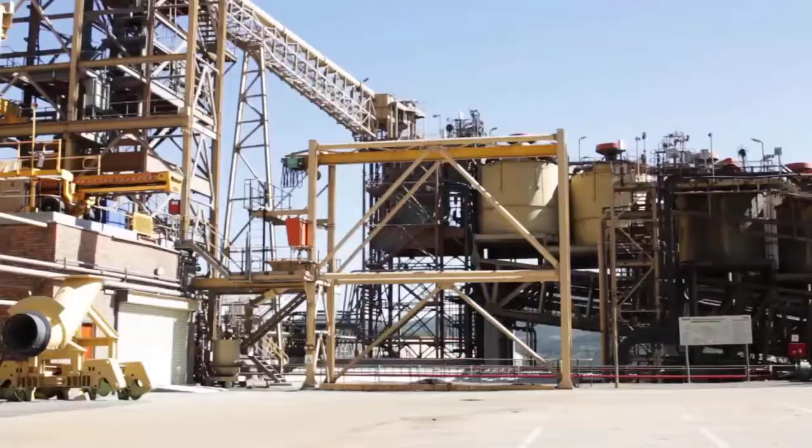Most continuous production processes operate for less than 30% of the time in ideal state, which represents substantial losses in terms of production output, costs, asset performance, quality, and impact on the environment. The TimeinState program implements a solution that increases the percentage time in ideal state and thereby delivers higher operational efficiency and effectiveness. Results include more than 18% increase in production output and increases in energy efficiency of over 7%.

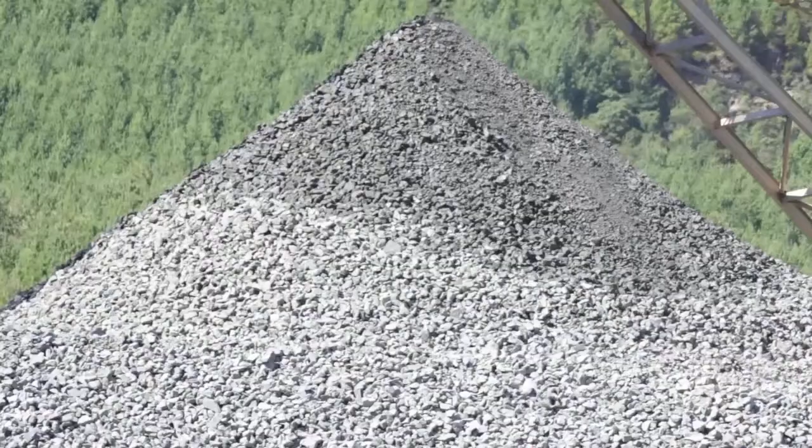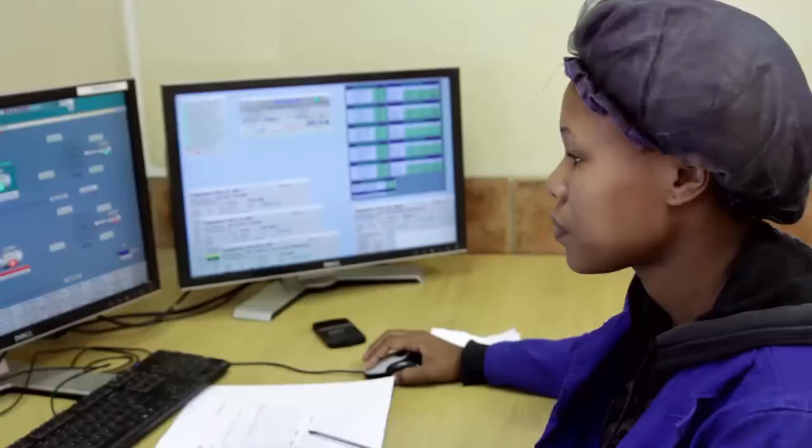These improvements translate into multi-million-dollar gains. These gains are delivered without changing the production process or equipment configuration. In any continuous process, maximum productivity is reached when equipment functions in ideal state or the optimum operating envelope as much as possible. The problem is that processing plants observe significant variance in performance, irrespective of sophisticated process control systems.

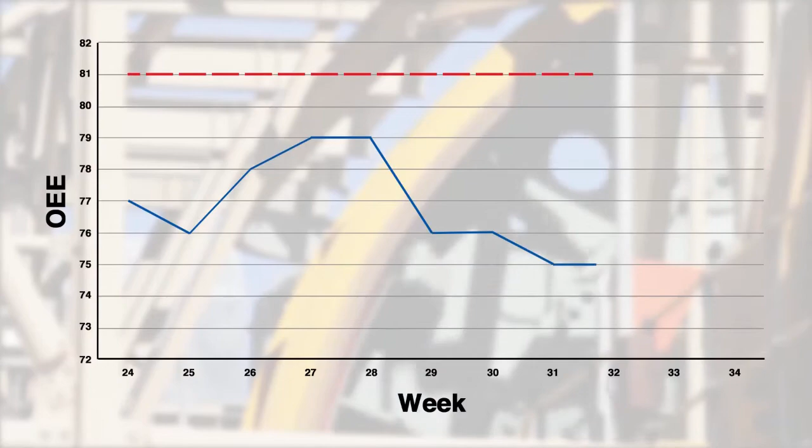In fact, most continuous processes run in ideal state for less than 30% of the time. Needless to say, this has a massive impact on profitability. Over the past few years, various performance measurements like OEE have been applied in industry. Unfortunately, these solutions have their limitations and, although perfect for discrete processes, they can mask inefficiency in continuous processing plants.

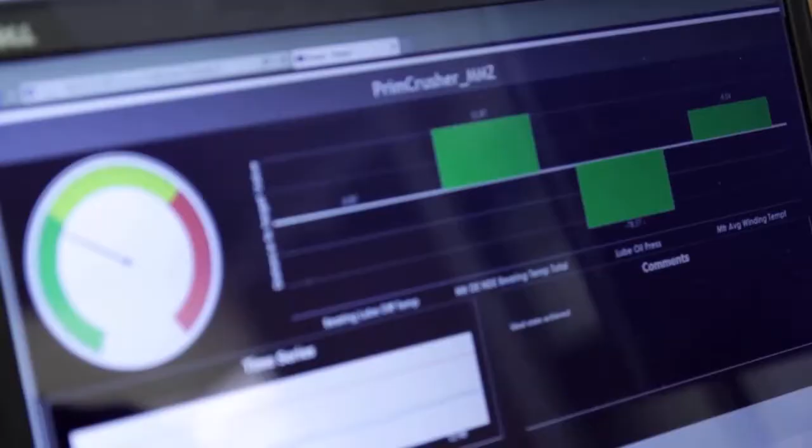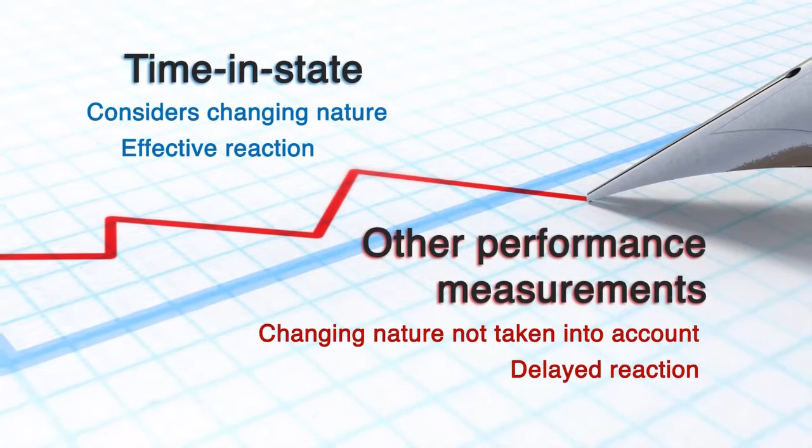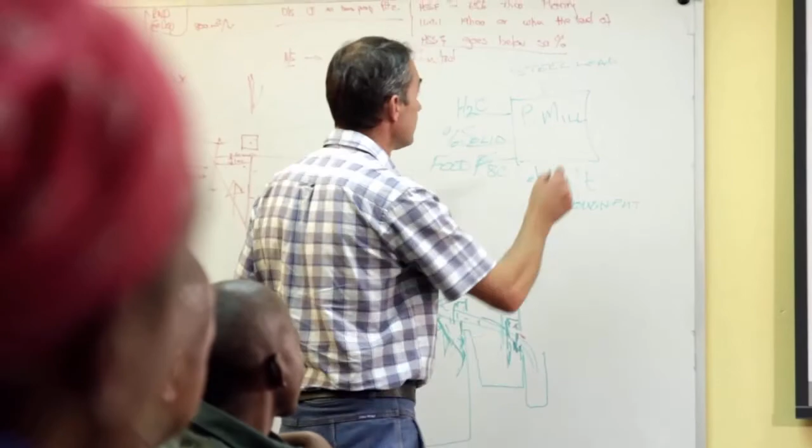It actually takes into account the changing nature of the continuous processes and the effective reaction to adverse factors influencing them, making it a far more useful metric for proactive management of the production process. The TimeinState system is implemented in various phases, starting with a current state definition and the compilation of a performance driver matrix, a critical element to facilitate emotional and intellectual engagement.

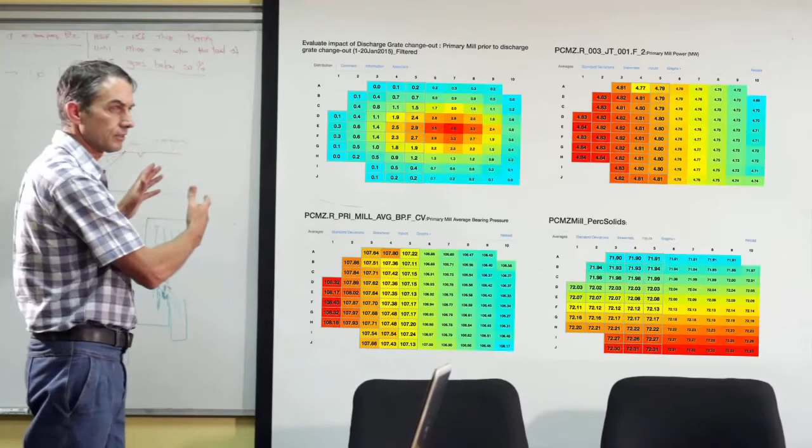TimeinState analytics is then used to extract and visually represent variable interrelationships in performance maps. These maps aim to define specific operating conditions that associate with high performance. The implementation of the IME TimeinState metric was a fairly easy process. It was well facilitated. They had constructive communication with these guys. So in explaining to them what the process is doing and what the model will help them to do, there was frequent interaction and face-to-face contact.

Continuous measurements are depicted on performance maps as a matrix of values describing process behavior and conditions. This way, patterns become apparent and enable the identification of internal benchmarks or baselines. They've taken a vast amount of data, looked at the data, analyzed, saw the trends, and identified the major KPIs that contribute most to the optimal functioning of the plant. A well-documented and well-defined reporting tool.

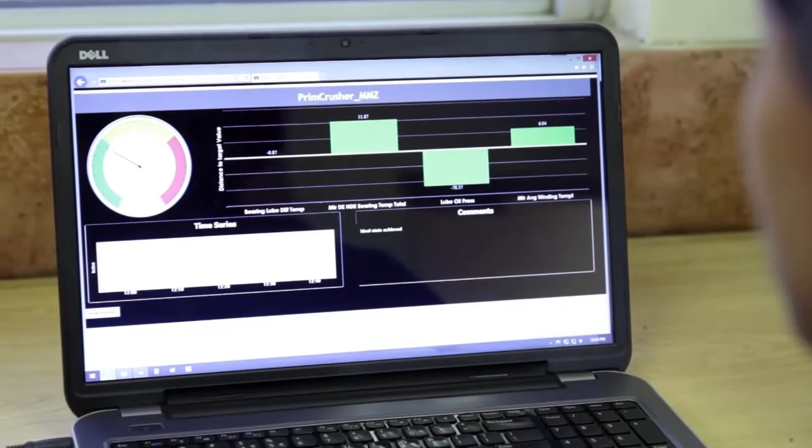TimeinState was essential to see when we were getting the best performance out of specific unit operations. It takes out personal preferences, past experiences, and looks at the data and information at hand to inform the optimization process. After deploying and integrating TimeinState models with a control system, the system continuously tracks when and how close the functional unit is operating to baseline, while depicting the key influencing factors that are causing the unit to deviate from ideal state. A user-friendly graphical interface further empowers operational personnel to address issues in real time.

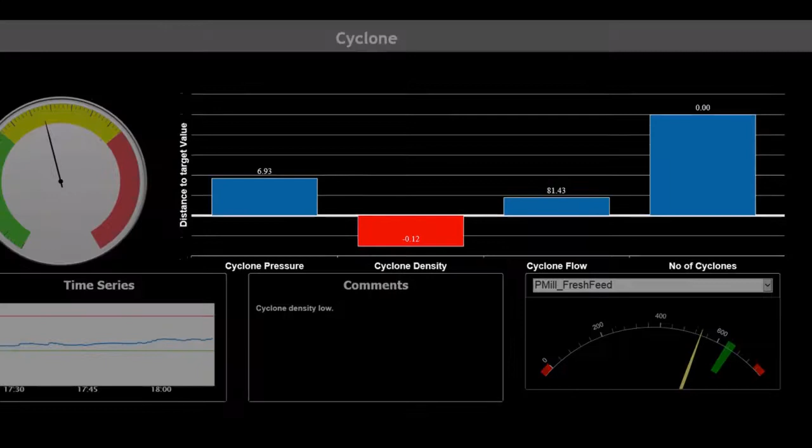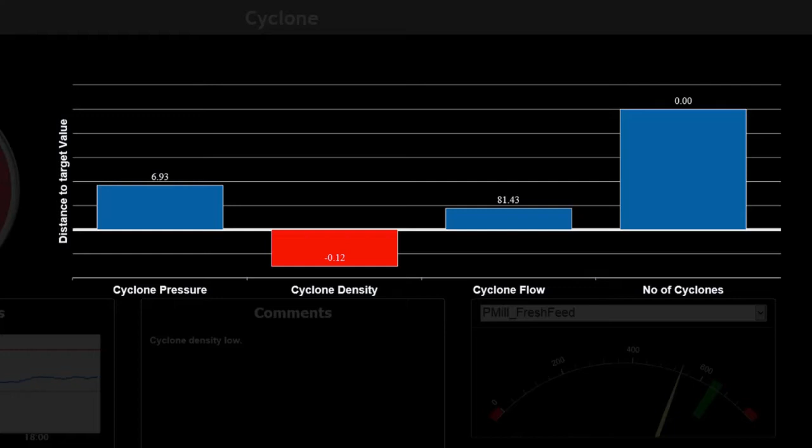The performance index dial on the top left-hand side indicates how close the system is operating to the ideal state, represented by the green range. To the right of the dial, the key process influencing factors are displayed as bar graphs. The dial will move outside the green range as soon as any one of these key factors exceeds defined constraints, and the particular key factor bar will turn red.

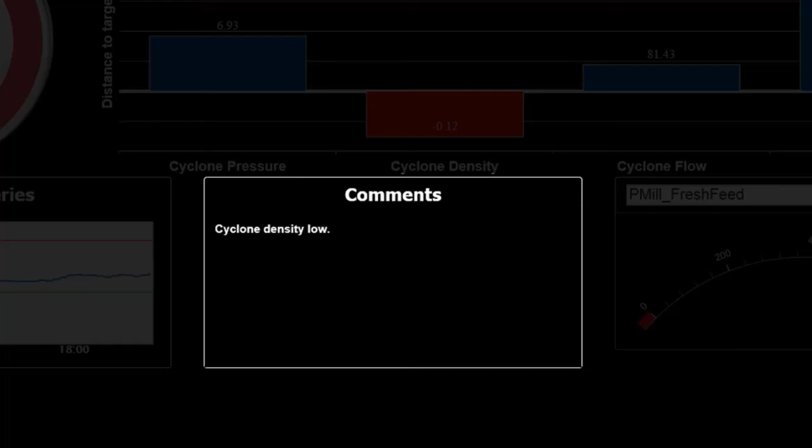An information box in the lower middle part of the interface displays context-sensitive information, which will enable and guide operational staff to take the best course of corrective action. It's a much simpler and easier way for the operator in the control room to know this is the first thing I need to actually go and do. And that has got a real-time effect on the production of the plant.

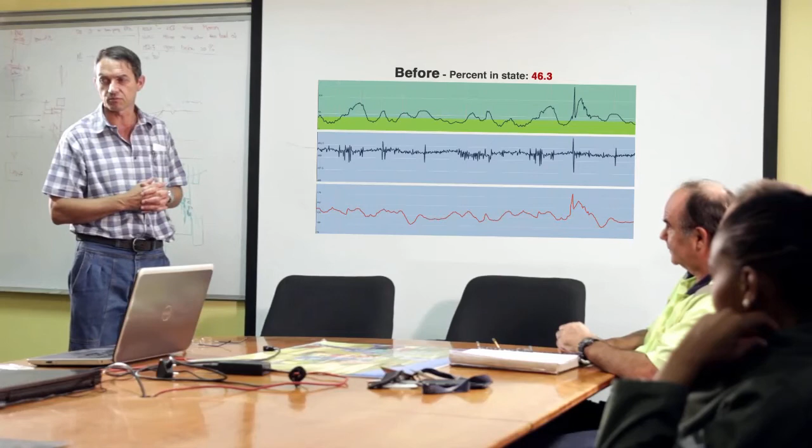After implementation of the solution, mapping is repeated for the now more stable process to confirm assumptions and mental models. Detailed reporting provides practical and useful functionality to management. A big benefit was that IME came to site. They spent time with the foreman, they spent time with the control room operators. The weekly meetings, especially in the initial stages, were key to actually make sure the bigger team were all aligned.

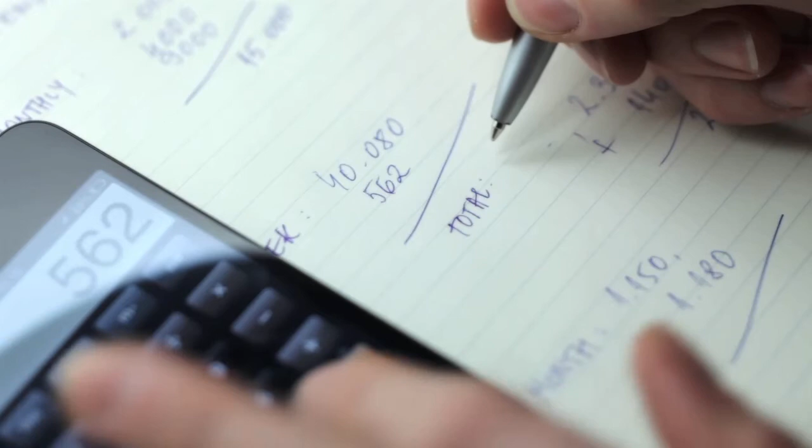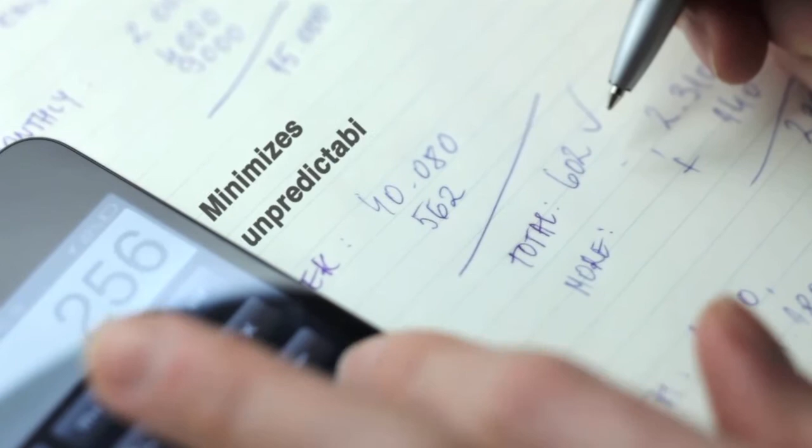We managed to get real facts where people got debates on an open forum without funny opinions and misguided opinions coming into play. So it really did serve to focus a lot of our discussions and optimization sessions. The implementation of the TimeinState metric brings about considerable financial improvements within continuous process industry companies. It enables excellent control over operational risk, simplifies usually complicated decisions, and minimizes unpredictability by addressing variances in efficiency in real time.

Improving recovery has a major financial benefit to us. We actually saw improved recoveries, and there was a definite improvement in the quality of the product that we produce. So that was a huge financial benefit. TimeinState is also an invaluable tool in terms of motivating capital to be spent in the organization.

We've seen a significant improvement in plant performance. There's a significant cost benefit in changing a piece of kit in a planned fashion rather than on a breakdown fashion. Reducing production losses and also created a sense of stability and predictability on the plant as well. Processes and procedures are streamlined and optimized like never before, enabling the continuous process plant to reach and maintain highest levels of efficiency.